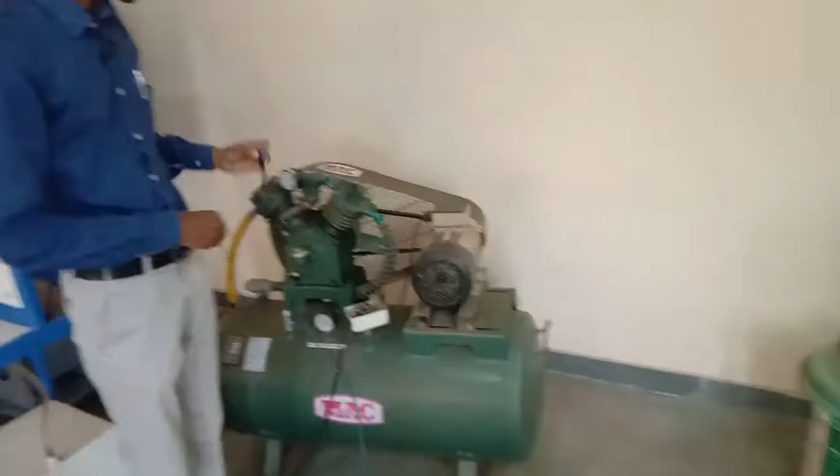So these are the cylinders or the reciprocating cylinders for the air compressor. The compressed air from these cylinders is supplied to the receiver, so this is the receiver, or we can say the air tank, and this is the prime mover. This compressor is run by using this electric motor.

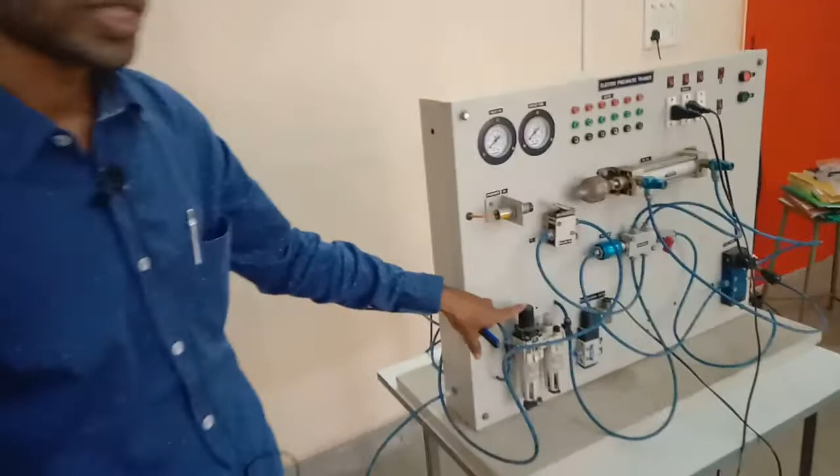Now from this receiver, the pressurized air is supplied to the FRL unit. So this is the FRL unit, also called the air service unit. From this FRL unit, we can supply the required pressure to the pneumatic circuit.

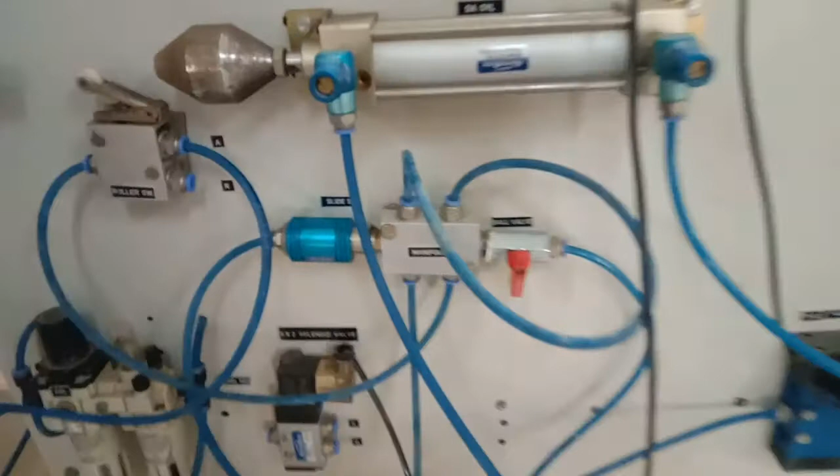Now from this FRL unit or air service unit, air is given to the manifold. So here you can observe this is the manifold. This manifold supplies the air to the direction control valve and other components or actuators. So from this manifold, air is given to this direction control valve.

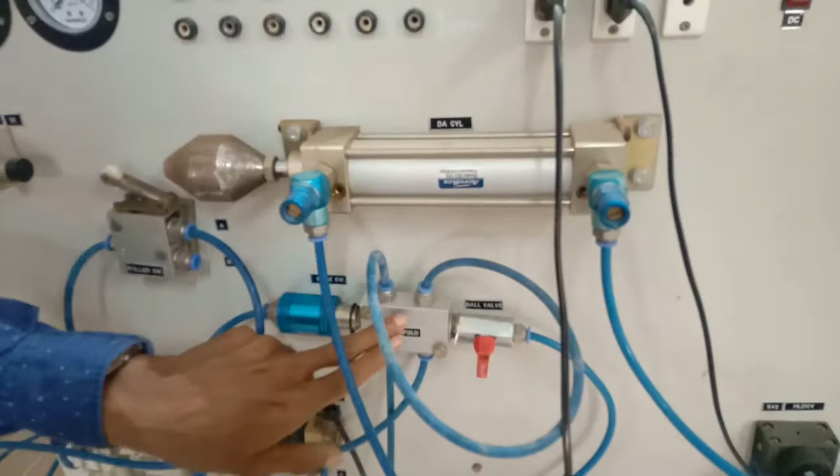So this is the HLDCV, that is hand lever operated direction control valve, and it is a 5/2 valve. Similarly, we can supply the air to a 3/2 valve or solenoid valve. From this direction control valve, air is given to the actuator.

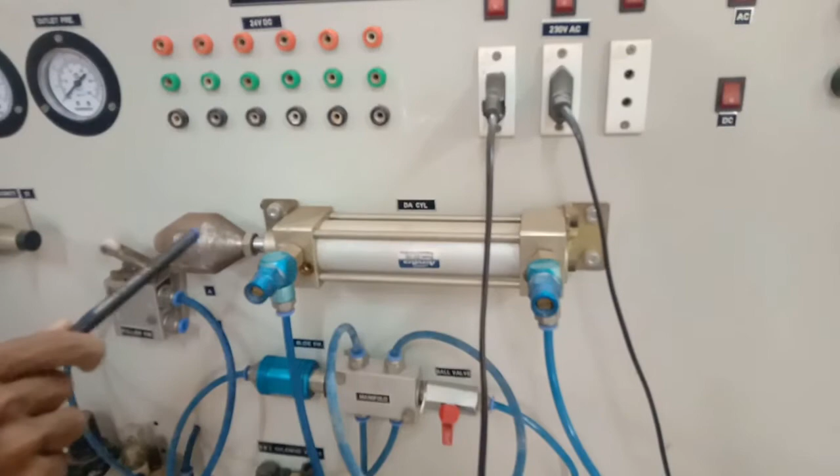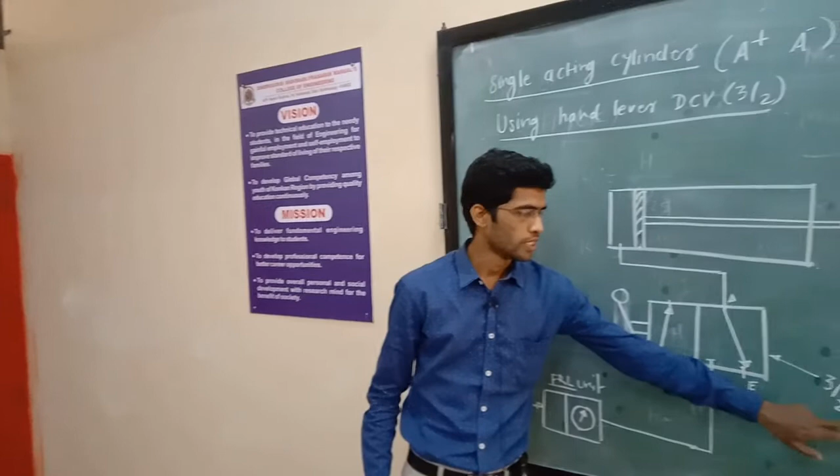So here you can observe the actuator, this is the pneumatic actuator, and we'll now see the working of the single acting pneumatic circuit by using 3/2 HLDCV, that is a hand lever operated direction control valve.

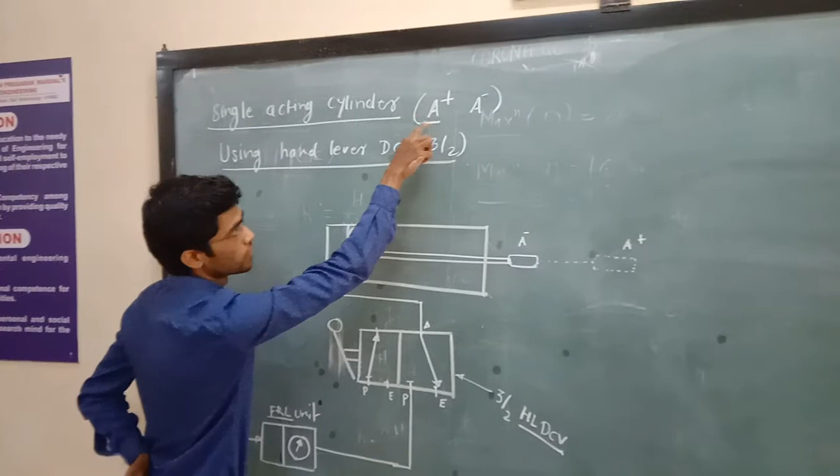So the required motion for the single acting cylinder is: we want to move the piston in the forward stroke, that is called the A plus stroke. Then we need to retract the cylinder, that is the piston to the A minus position. So here this is the single acting cylinder.

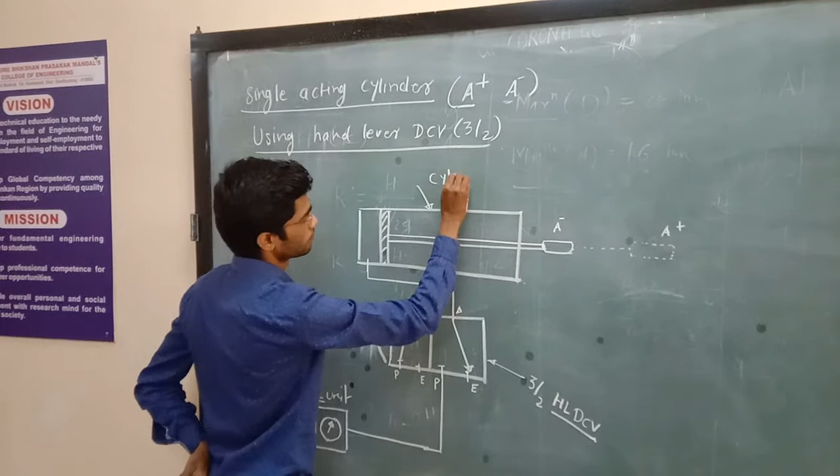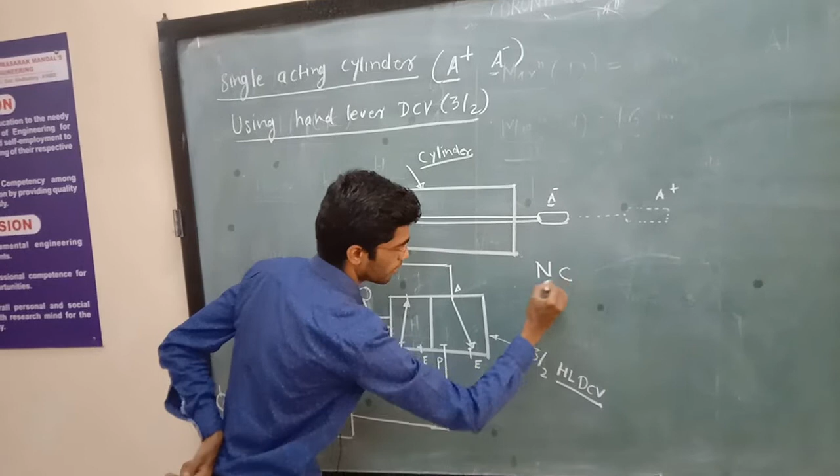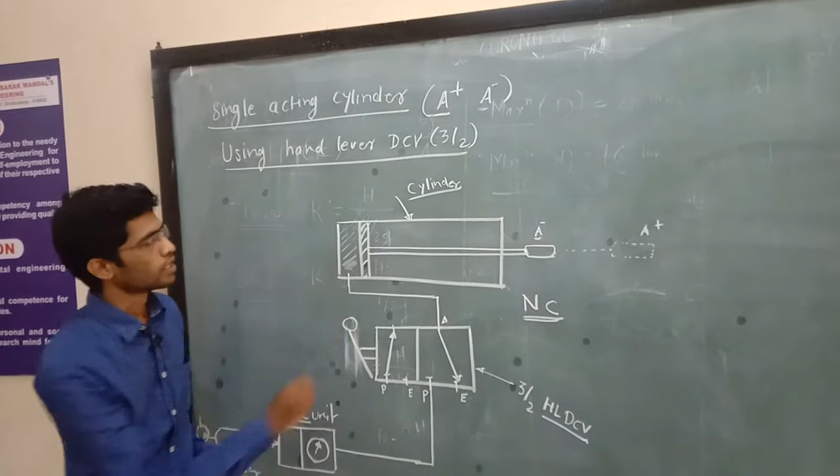Initially the piston is at the A minus position. This position is called the normally closed position. So when we supply the pressurized air to the left side of this cylinder, then this piston will move to the forward stroke and it will get to the A plus position.

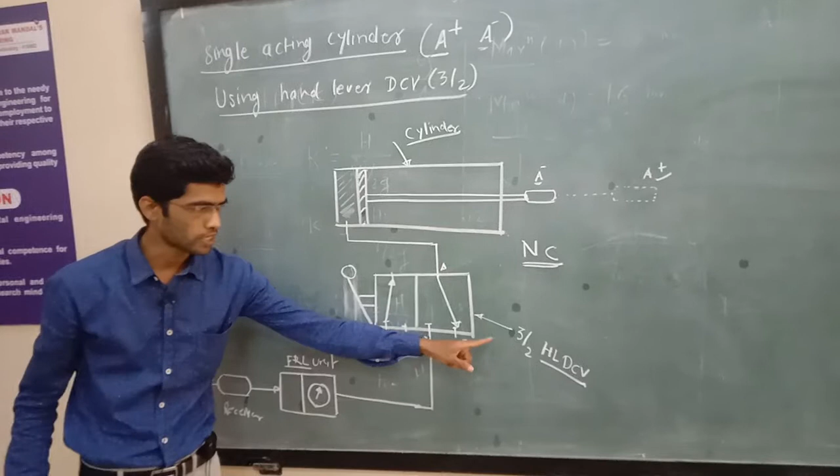This pressurized air is supplied with the help of this direction control valve, that is called the 3/2 direction control valve. So you can observe here we have two sides, this is the left side and this is the right side.

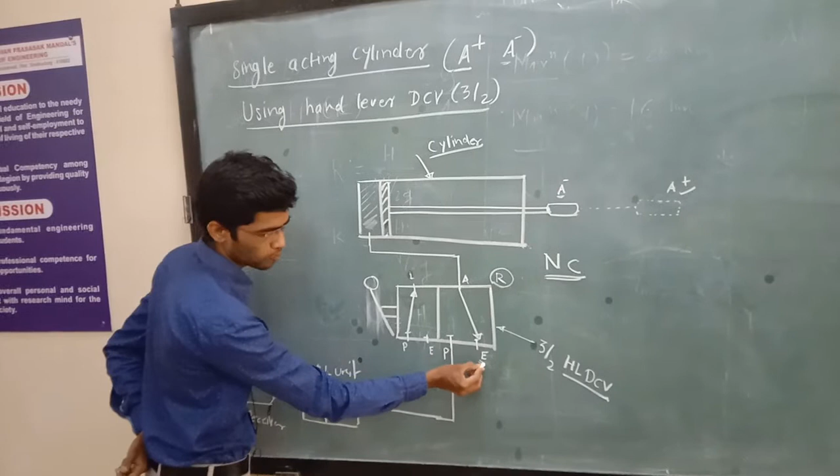So in the right side, when it is active, this A port is connected to the exhaust port. That means air from the left side of the cylinder is supplied to the A port, and from this A port it is exhausted to the atmosphere.

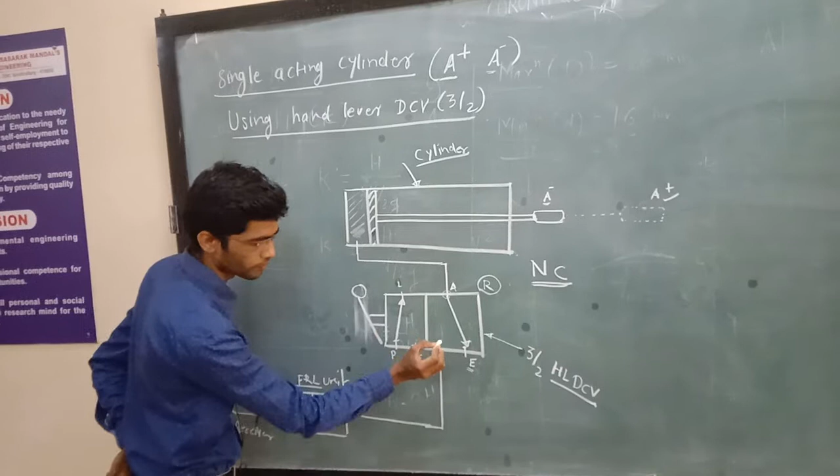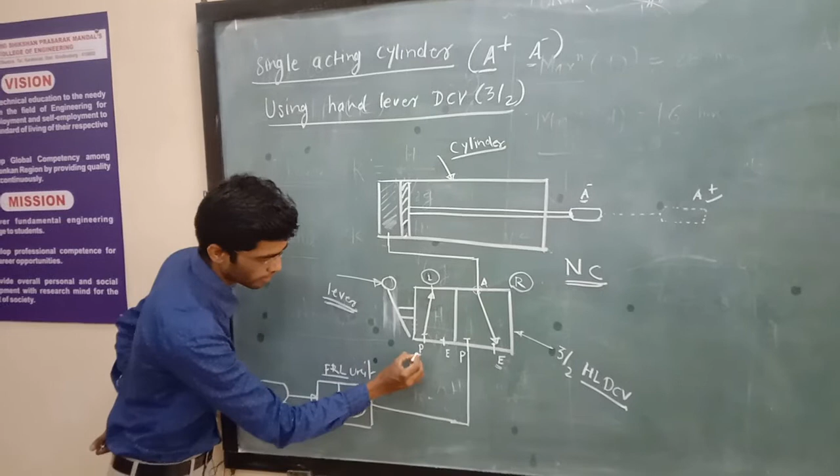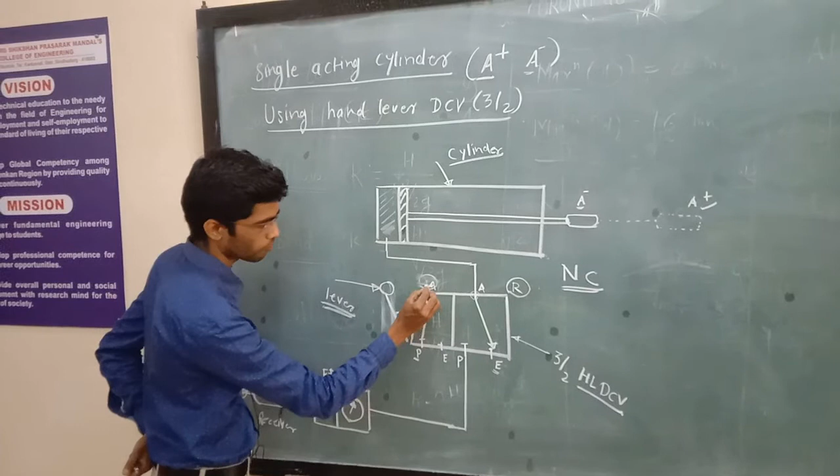When we operate this lever manually, then we will activate the left side. So on the left side, this is the arrangement: the P port, called the pressure port, is connected to port A. That means from the pressurized port, air is supplied to the A port, and from A port, air is supplied to the left side of this cylinder.

And then this piston will move from the A minus position to the A plus position. So this is our forward stroke.

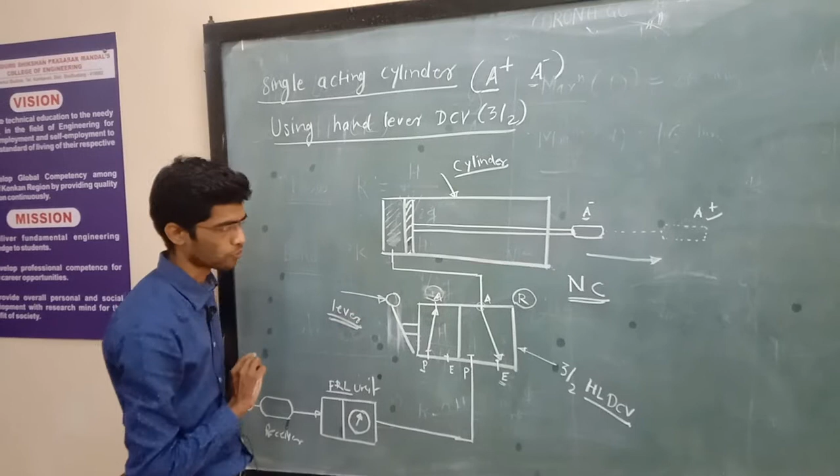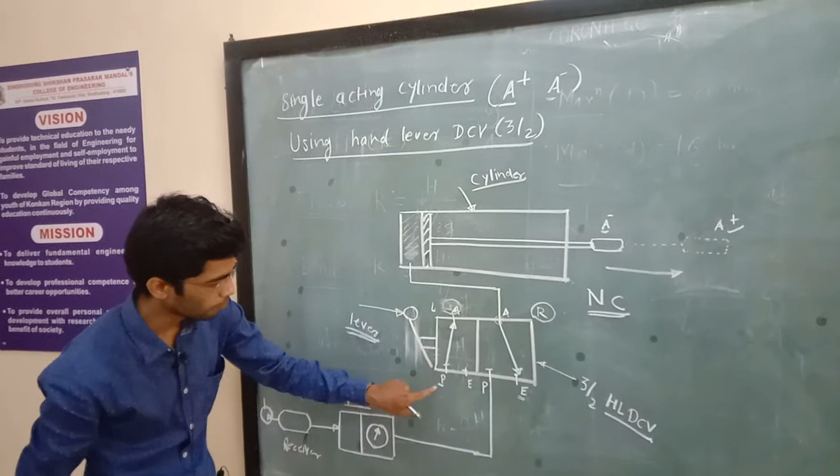So in the normally closed position, the right side is active, that means air is exhausted from the cylinder. And when we operate this lever, then the left side will be active, or we will excite the left side, and then P port is connected to A port, and from A port air is supplied to the left side, and then the piston will move to the forward stroke.

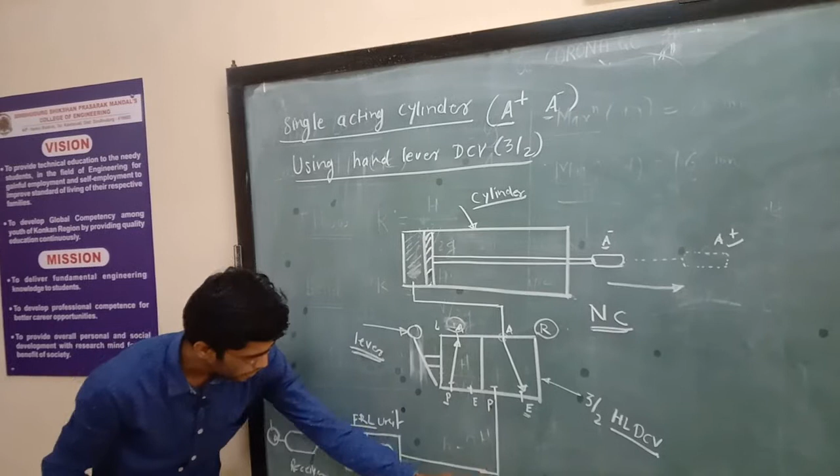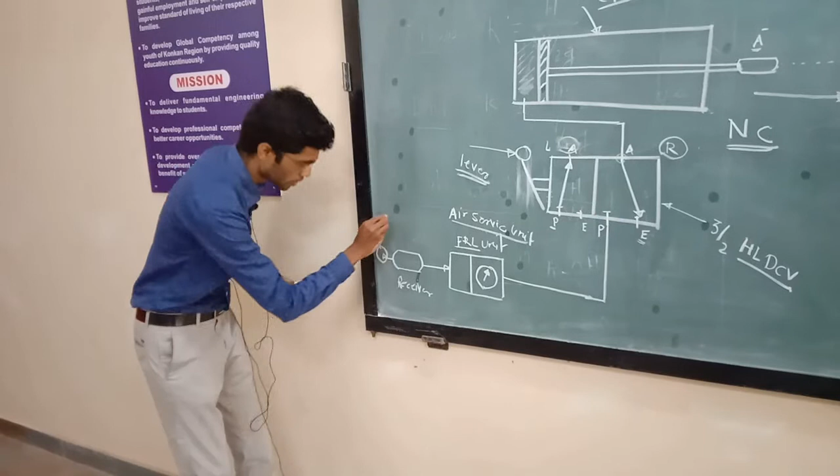Now to the pressurized port, air is supplied with the help of this FRL unit, called the air service unit. Air service unit consists of filter, regulator and lubricator. Air service unit receives the air from the receiver, that is the air tank, and the air tank receives the air from the compressor. So pressurized air is generated with the help of the compressor.

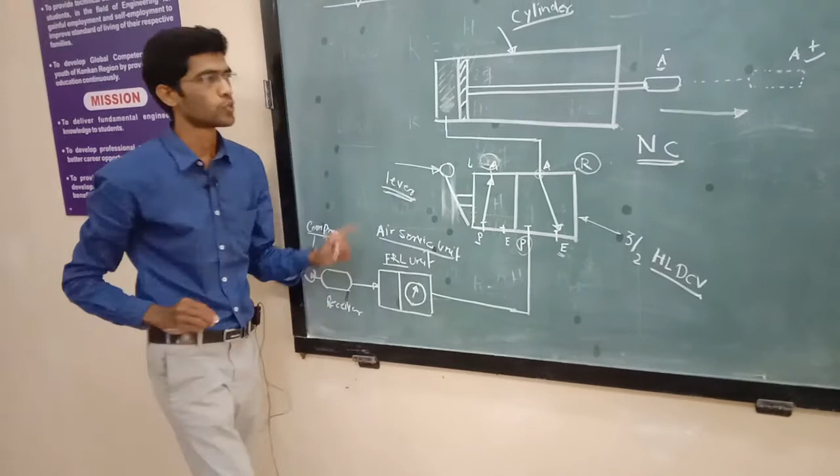From the compressor, it is supplied to the receiver, then the receiver supplies the air to the FRL unit, and the FRL unit is connected to the pressure port. So this is the working of the single acting cylinder using the hand lever 3/2 valve.

Okay, so now we will see the...